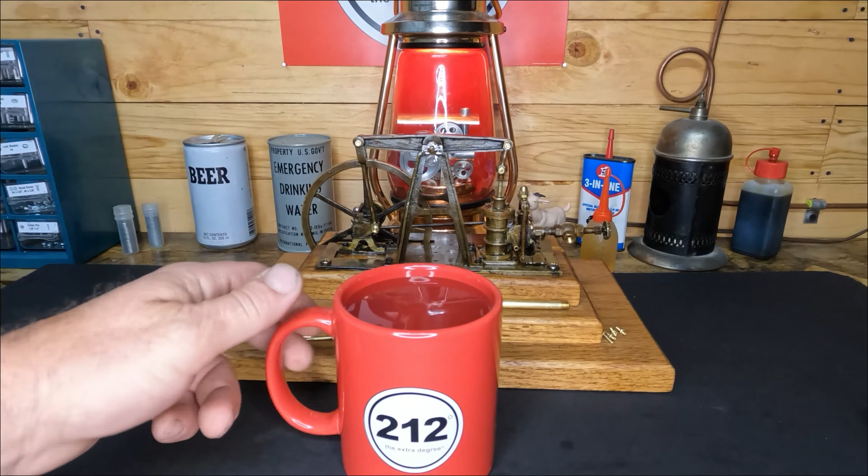We made a short video, uploaded last night, on this old walking beam engine, but that's not what tonight's video is about. We've got a bit more work to do - we're going to pull the main caps off, and since this screw isn't the right size, we'll put studs in here and nut it down. It still runs really well, and we got that knocking sound out of it. With that said, let's get this guy out of the way.

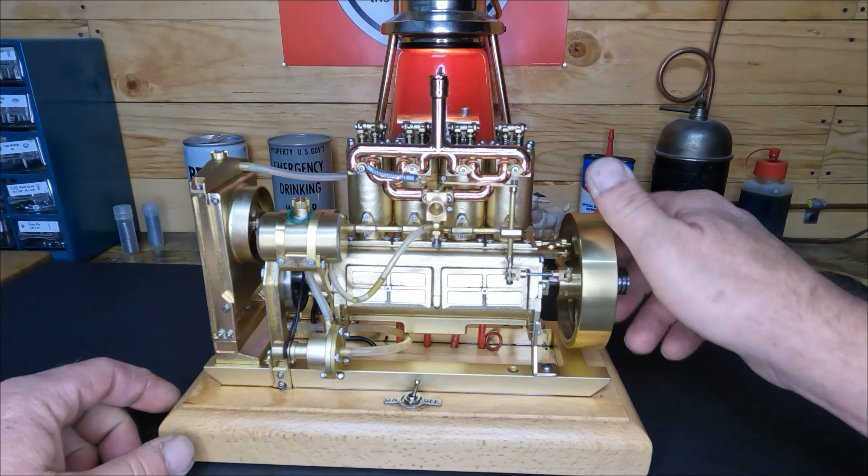It's been a little while since we've looked at this Holt engine - I haven't started it up in almost a month. Let's get some fuel in here and get it started up. I put a spring on the throttle to keep it at an idle since we don't need to run it that fast. So let me get some fuel in there - we're going to use that same 40-to-1 VP fuel, 94 octane ethanol free. Let me get that in there, I'll bring you guys back and we'll see what it takes to get it started up. You can see my hands in the way.

You guys can see the fuel moving up the line here. It looks like it's all the way up. I don't have it on my finger yet, but I'll put my thumb over it and hold the throttle open. And it fired - a little bit of fuel on there, so let's see what happens. Nothing yet. A little bit of throttle.

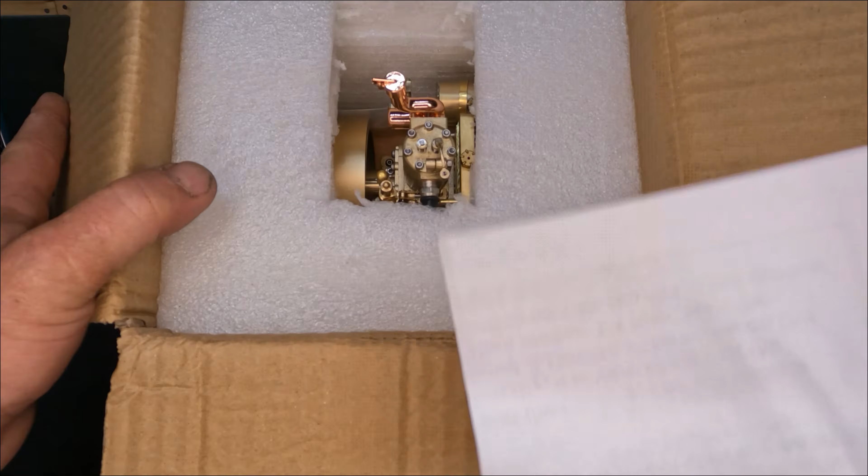We got a new box, so you know what that means - we get a first start on a brand new engine. Let's get this guy cut open and see what's inside. Get this cover off here. Oh, looks like we have some more fun deciphering instructions. Let me get this out of here, I'll bring you guys right back.

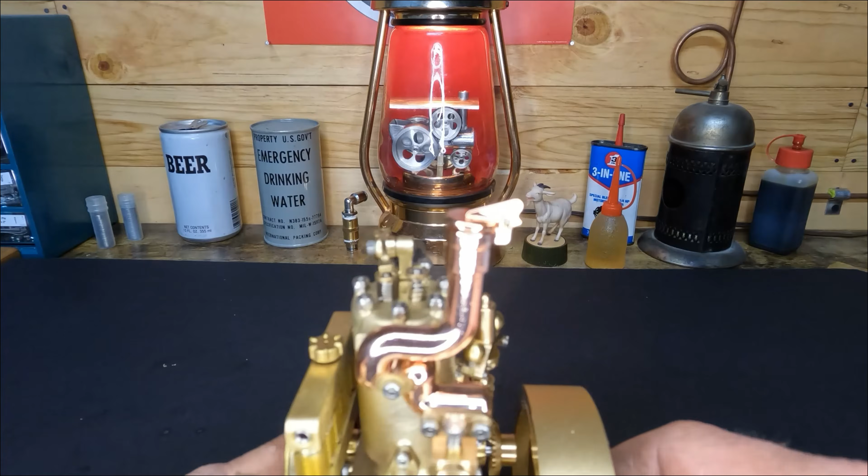Well, here, let's take a look at this little guy. You guys see any similarities between these two? Awfully similar - it's like we have a single cylinder of this, but on this Holt we have an inlet and an exhaust which is controlled by our cam. On this one we have our inlet and exhaust, but our inlet valve is atmospheric.

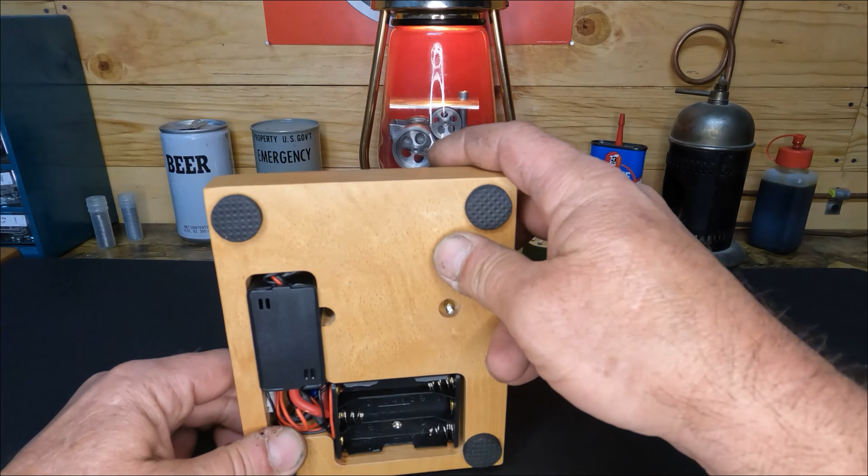Well, it turns over, it appears to have compression. First things first, let's get the batteries in the bottom so we don't flip it back over and dump anything out. It runs on 3 AA batteries, I'll get them put in, and then we'll stand it back upright. We'll put oil in our crankcase after we look at our instruction manual to see what it says. So give me a second, let me get the batteries in.

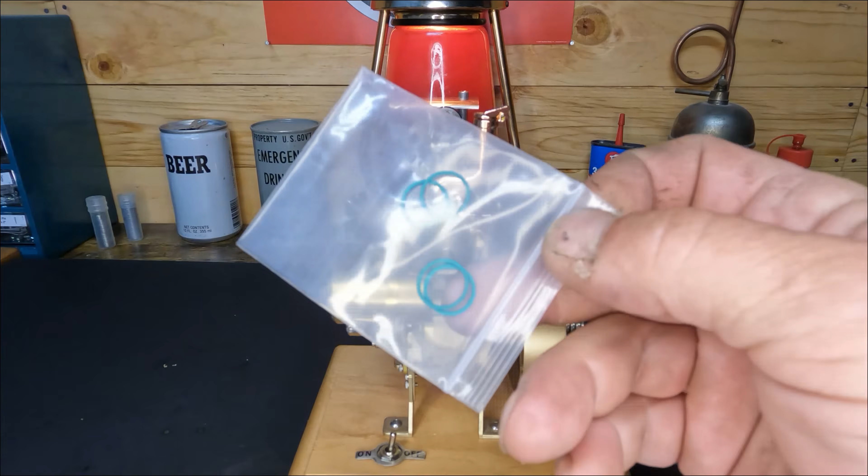Okay, well we got our batteries in there. This one comes with a drill start attachment and 4 spare piston rings. So let's look at our instructions. This is a model H73, 2.6 cc's, same 13 millimeter bore, 20 millimeter stroke.

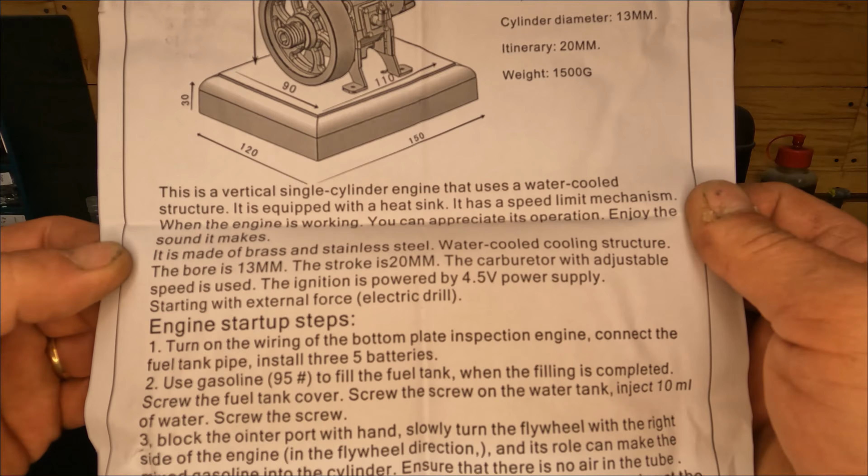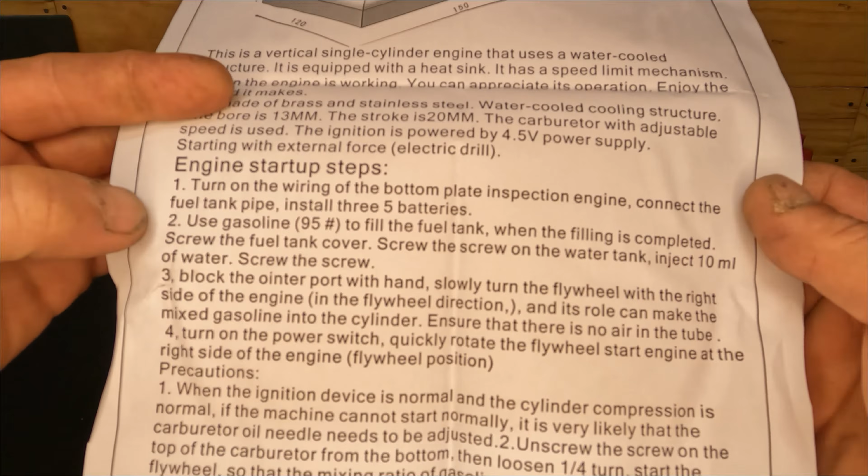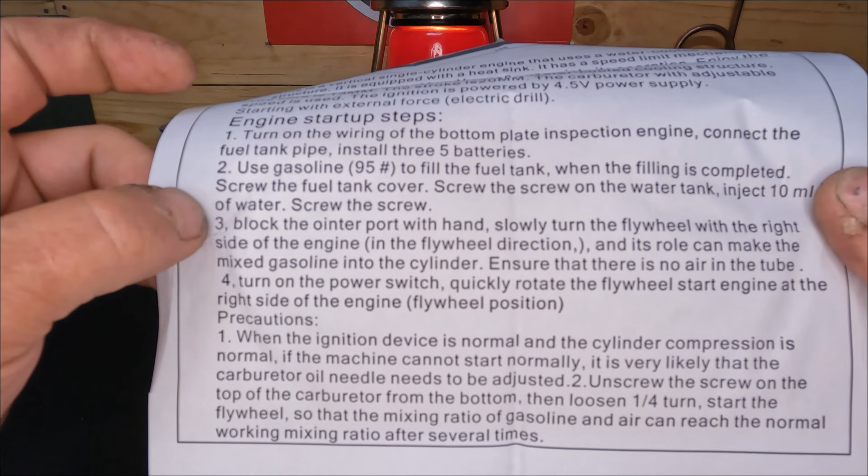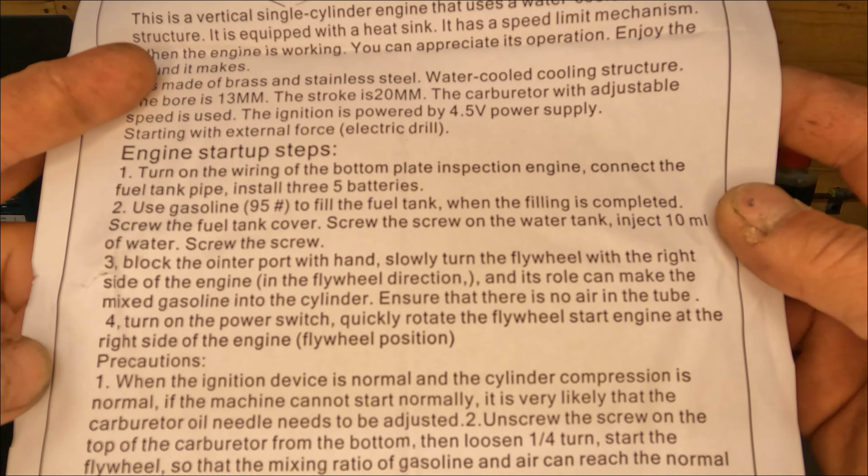It looks like it says turn on the wiring to the bottom, connect the fuel pipe, use obviously 95 octane, yeah this is 10 milliliters of water. I'm not sure what it means when it says block the ointer port by hand. I don't know if you guys can see it anywhere on here, but it says nothing about putting oil into the crankcase.

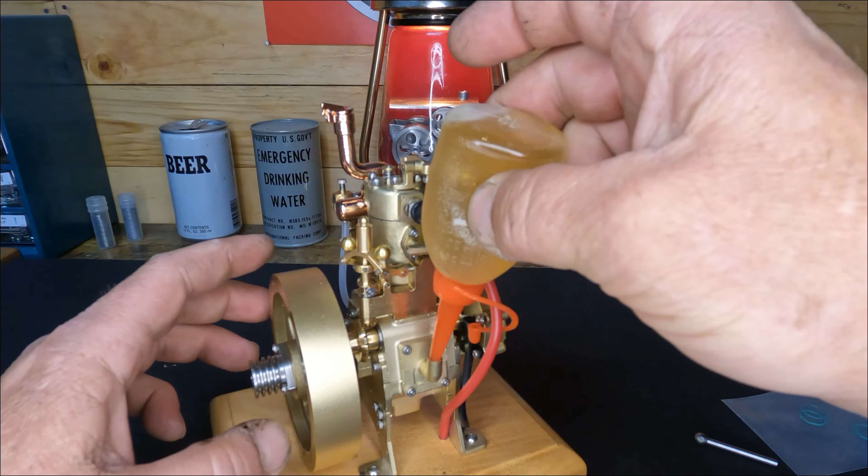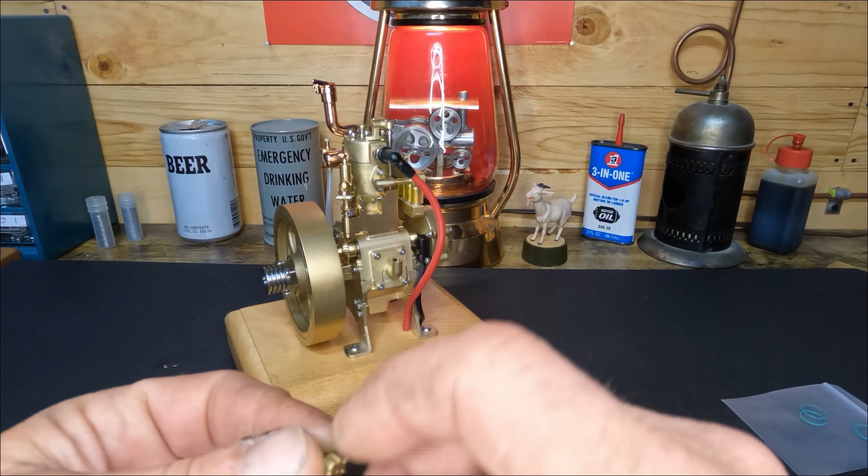Well, we're not going to follow these instructions because anything that moves needs to be lubricated, so I'm not sure how much to put in it, but they put a fill port on here for a reason. So we're going to use straight SAE 30 weight oil, and we're going to put some oil in here just to be safe. Let me get some oil in here. Okay, well this was full, and now we've put about 20 milliliters into our crankcase of SAE 30 motor oil. Get our cap put back on here.

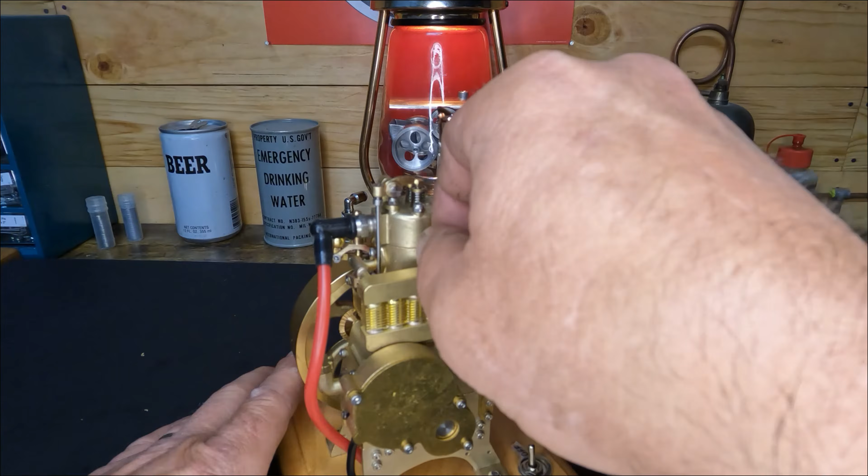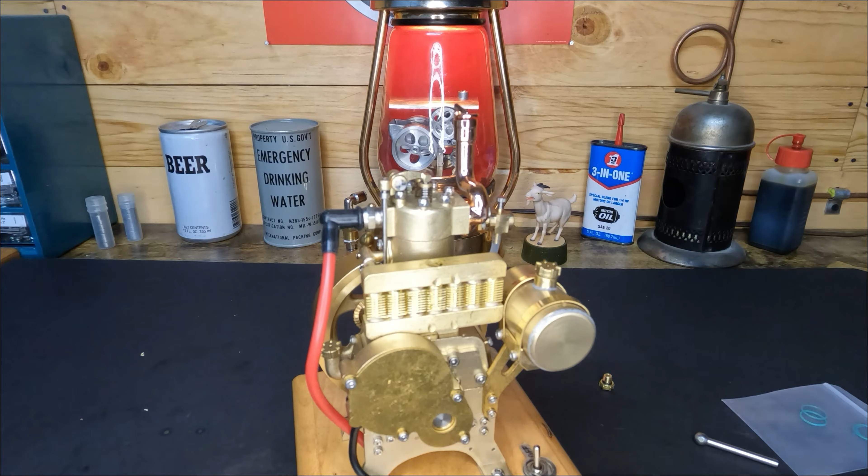Then we're going to fill up our radiator right here. We'll probably leave our cap off of here, so when it's running - this one doesn't have a water pump like that Holt engine does, but we'll go ahead and put some water in there. We'll use distilled water. Well, we've got water in here, we'll wipe up our mess.

So I guess the only thing now to do is add fuel to it and put our finger over the ointer, whatever the hell that is, and see if we can get it started. So let me finish fighting with this cap, put some fuel in here. So we've got our 40-to-1 fuel.

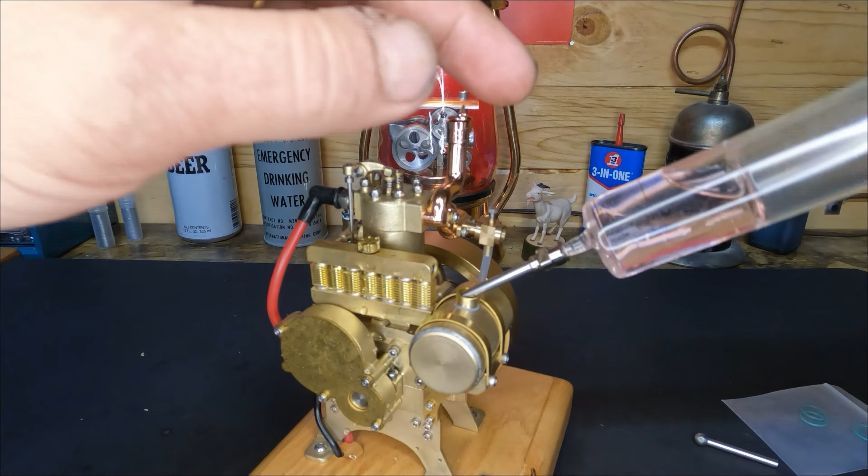Tank is full. We'll put our fuel cap back on. We'll probably put just a little bit of oil up here on our... classically sloppy, but that's all right. We're going to go ahead and put a little bit of oil on all of our moving parts up here.

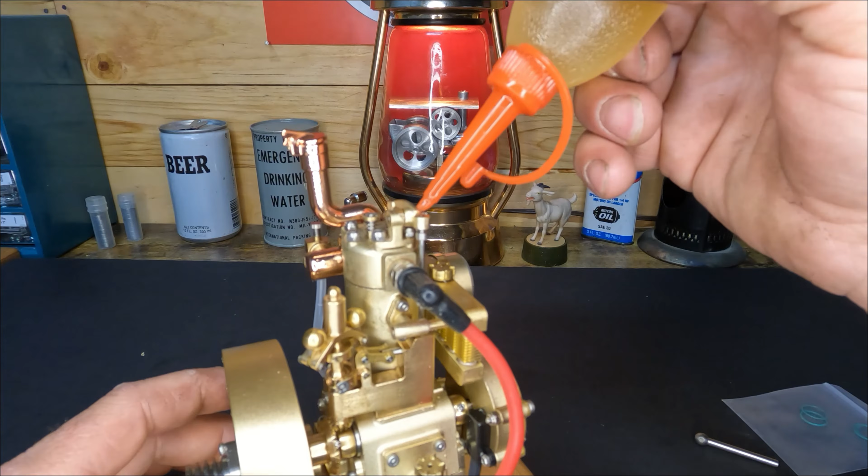Down here in the bore. Down here on the governor because it turns. And just a little bit on our gears.

Okay, well, let's turn it over. I don't know if you guys can see it or not. Our fuel level is right here. So I'm guessing that this is our ointer. And turn our, I'll leave it off.

I can feel it pulling, and our air bubble is gone. Let's turn this on. Oh, it kicked back, so.

Well, we've lost most of our compression. Alright, and obviously I put too much oil in it because it's puking out down here at the bottom. Let me get that cleaned up.

Alright, well, we got our mess cleaned up. And it's still going to puke some oil out, but let's see. We might use the drill attachment. Let's see what we can come up with.

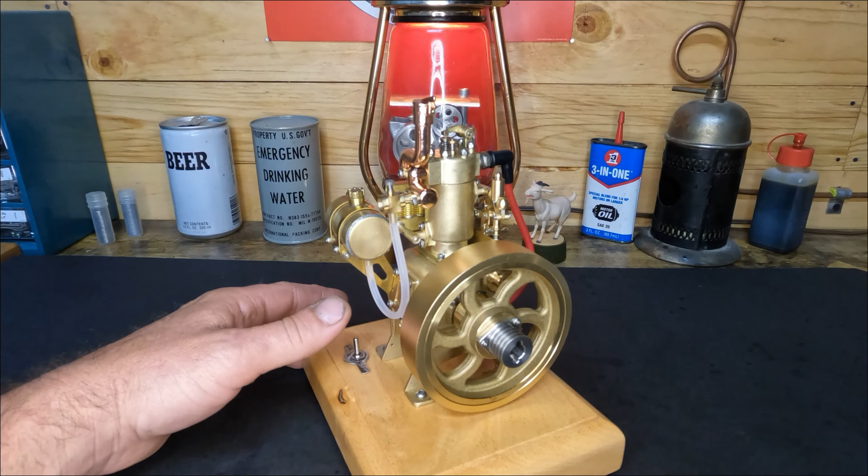Well, did we lose ignition? Well, listen. You guys hear that?

We still have spark to the plug. Do we still have spark at the plug? Let me get this out. We're going to take a look. All right, let's get this plug out of here.

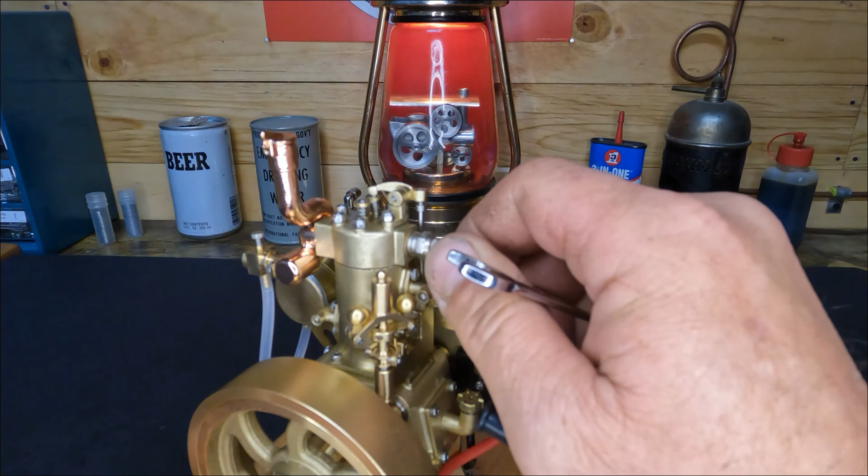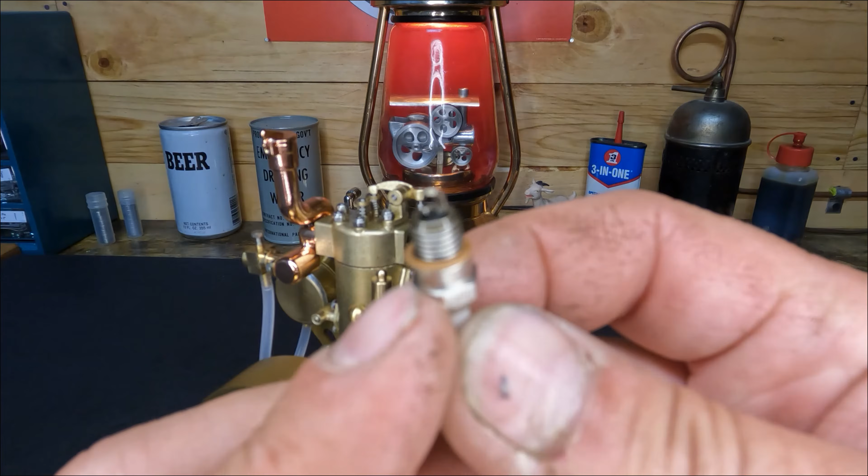It's got a hell of a gap. Look at the size of that. You see it? Wow. Let me get this plug cleaned up. I think we oil fouled our plug.

We'll lay it up here where we can get ground and we'll check our spark. You guys see what we're doing? Watch me get zapped. I can see spark. I don't know if you guys can see it. You might be able to hear it.

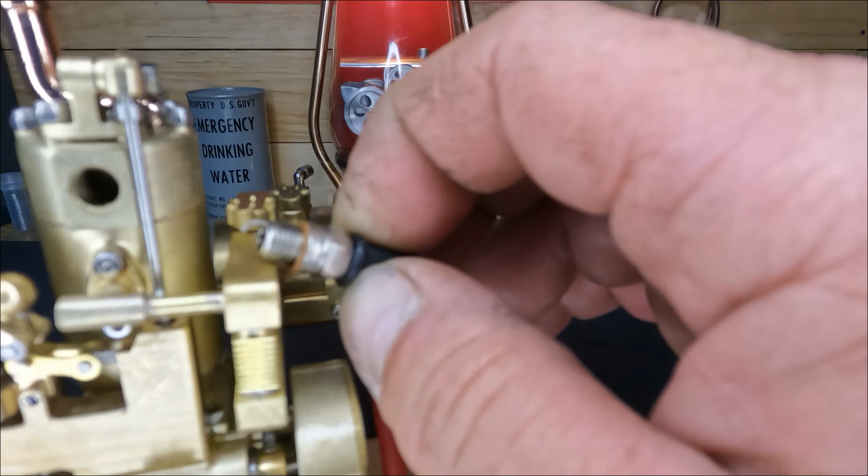Alright, well. Yeah, it's not firing at our electrode. It's firing off to the side. Let me pull you guys in, let you guys get a look at this. I know the focus is going to be terrible.

Well, all right, let's get another plug in here. Okay, well, we got another spark plug here. Let's give this guy a shot and see what we got. Ignition's on. There, now it's firing into our electrode. Okay, let's put our plug back in and see what we got. Probably just end up fouling this one out too.

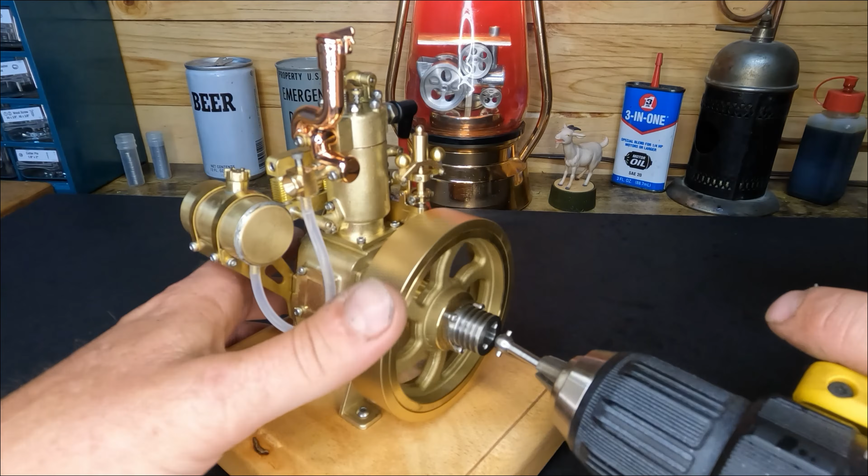Alright, well, we do have it running again. It doesn't run that good. Trying to adjust it.

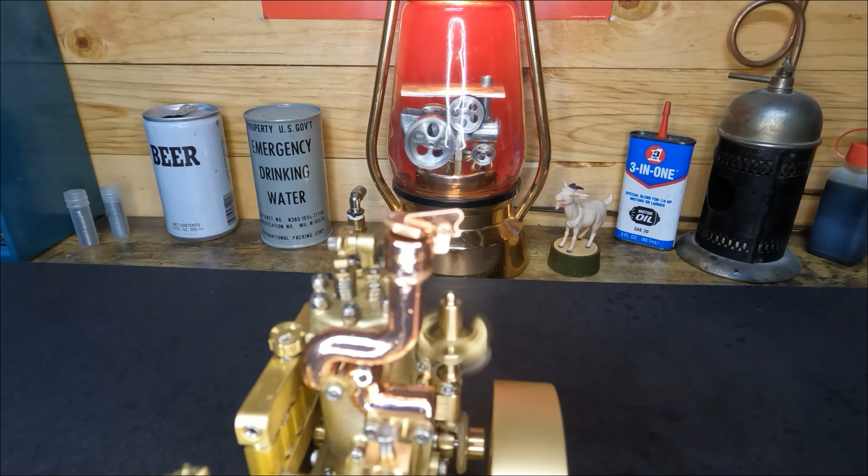Appears to be spitting water out of the exhaust. If you guys can see this, oh yeah, that's what you can see. It's spitting water. We got a blown head gasket or a cracked cylinder or something. You guys can see we're forcing water out of the top of this, so we're losing compression through there.

I guess it is running, but it ain't good, guys. So, well, yeah, we've got problems. Well, I guess we're going to tear into this guy. Let's get that walking beam fixed first.